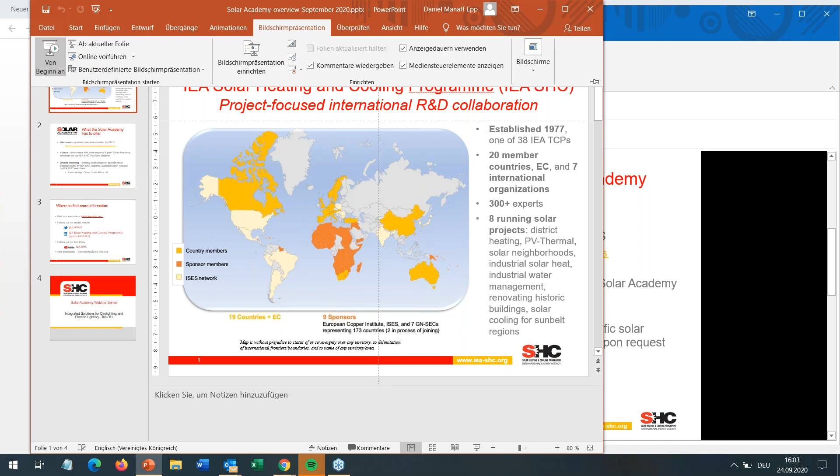SHC, the IEA Solar Heating and Cooling Program, is a collaborative research platform, really huge, with over 300 experts from around the world, from 20 member countries, the EC, and 7 international organizations. We have currently 8 running research projects, covering a wide range of topics all linked with efficiency and solar energy: district heating, PV thermal, solar neighborhood, industrial solar heat, renovation buildings, solar cooling for Sunbelt regions.

What we offer as Solar Academy is regular webinars, hosted with ISES. You hear one today, and you can find recordings of previous webinars under this link. We also offer videos on the YouTube channel, made with experts at conferences or around Solar Academy webinars. And we offer on-site training available on request by IEA Solar Heating and Cooling member states. The last trainings were in China, South Africa, and the UK.

If you want further information, please consult our website and follow us on social media. You see the Twitter and LinkedIn links here, and you can use our YouTube channel. If you have additional questions, please contact the Secretariat.

Today's webinar in this Solar Academy series is titled Integrated Solutions for Daylighting and Electric Lighting. Task 61 is IEA Solar Heating and Cooling slang, meaning it's the short-form name for this research platform within the program.

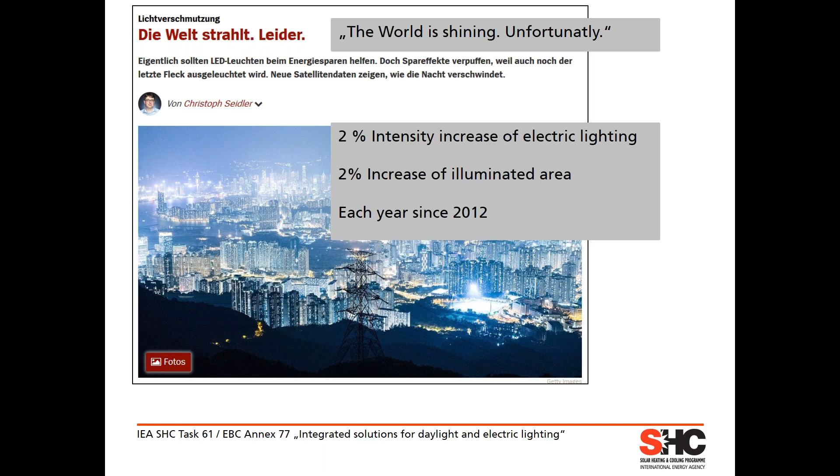We know that lighting accounts for around 15% of global electricity consumption, and also that lighting accounts for around 5% of greenhouse gases. So lighting and energy efficiency definitely is a topic we have to look into.

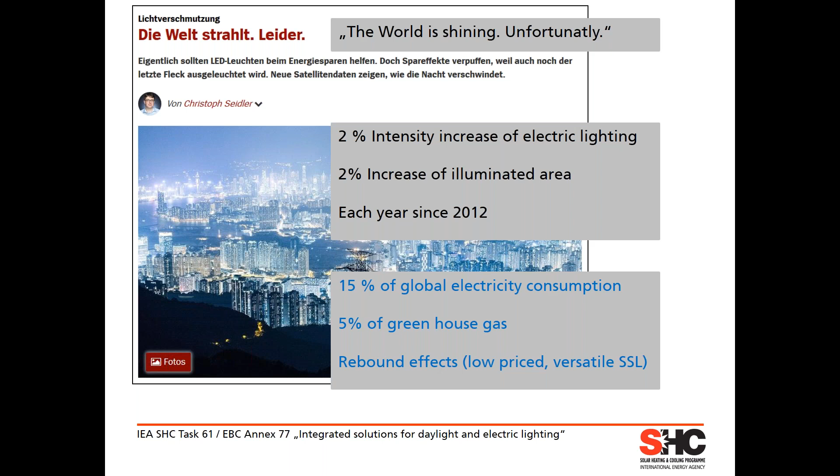Looking into the market, we all know about very efficient SSL systems, LED systems now around, but nevertheless we are seeing worldwide so-called rebound effects. Low price and very versatile LED systems are being used more and more in parts, compensating the efficiency gains we got.

A little on the background of the markets we are in: on one hand side, electric lighting. We went through a transition of technology here, around 70% estimate of market volume now in Europe in LED technology, replacing older technologies. We have an efficiency boost here, LED systems around twice as efficient as the formerly used fluorescent lamp systems.

And now the next step in electric lighting is very much into the digitalization of light, so you're getting more features, more functionality in parts for less money. It's a very dynamic change and transition we are in currently.

The other aspect we're dealing with is the facade, and thereby the facade influencing the daylight supply in buildings. The facade market has around 1.3 billion square meters of new facade put up each year. That's an amazing number, equivalent to the area of the city of London, put into place year by year. This has a huge impact on daylight supply and therefore lighting conditions in interior spaces.

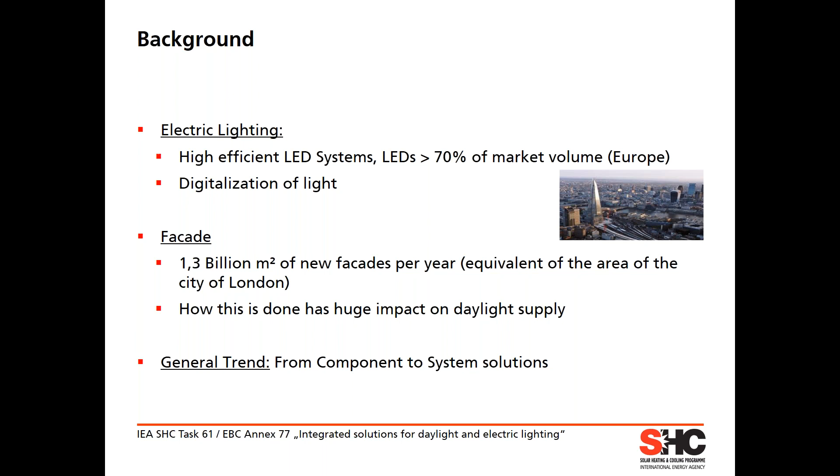Generally we see the trend of moving from component development more into system solutions, trying to optimize the integration of different components. That brings us to the topic of our working program: open issues in the integration of day and electric lighting. That addresses user aspects, energy efficiency of these combinations, technology side, and also market aspects for industry and for design practice.

Just to give a couple of ideas we addressed in the beginning of this activity: definitely the side of the user perspective. We are seeing changes in design and control parameters as we understand better that we have to meet not only visual but also non-visual effects. When designing lighting installations, we have to tailor lighting systems to different ages of people and users of spaces, and this has implications for different and additional targets in lighting designs.

For instance, we might see higher illuminance levels part of the time in future indoor spaces. That raises the question of whether we necessarily need higher energy demands for this, or if we can solve it smarter by, for instance, using more daylight. This has implications for new products, methods, solutions coming up - new control strategies, new luminaires, or also new rating methods.

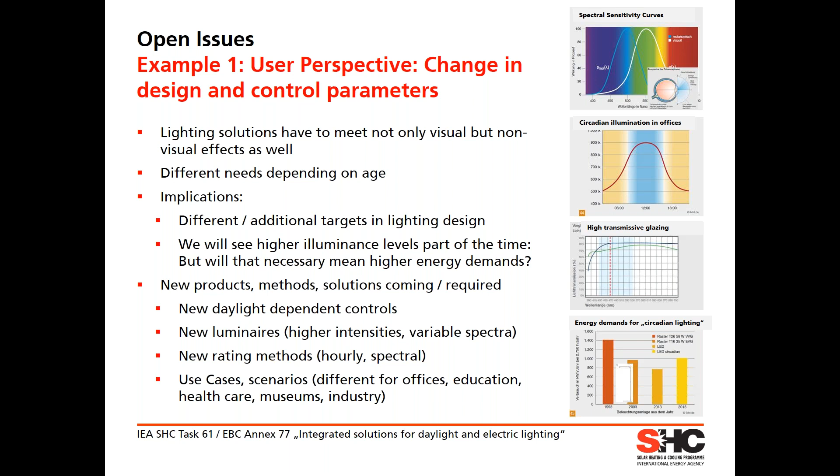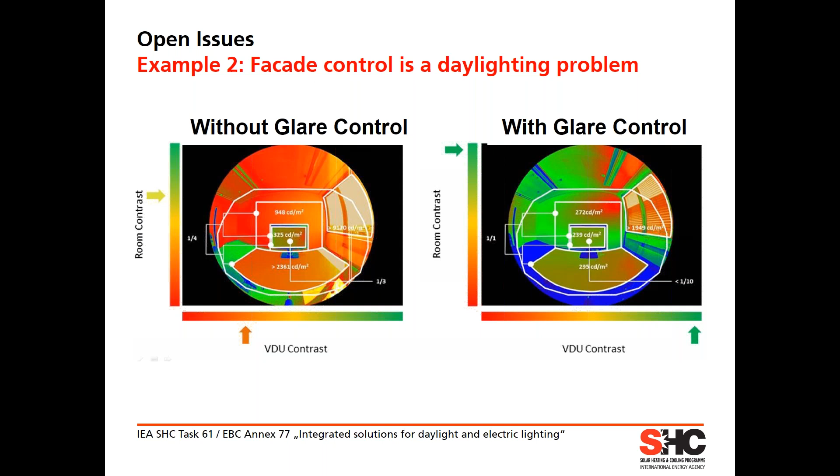Another issue is the integration of lighting environments in indoor spaces, bringing together light coming from the facade through sun shading and glazing systems with electric lighting. Up to now this has very much been driven from the facade side by solar controls, and lots of studies show that when people actively switch their facades or sun shading systems, they do it for lighting reasons, not thermal reasons. So the job to get done is to integrate these approaches better and bring electric and daylighting aspects together at workplaces.

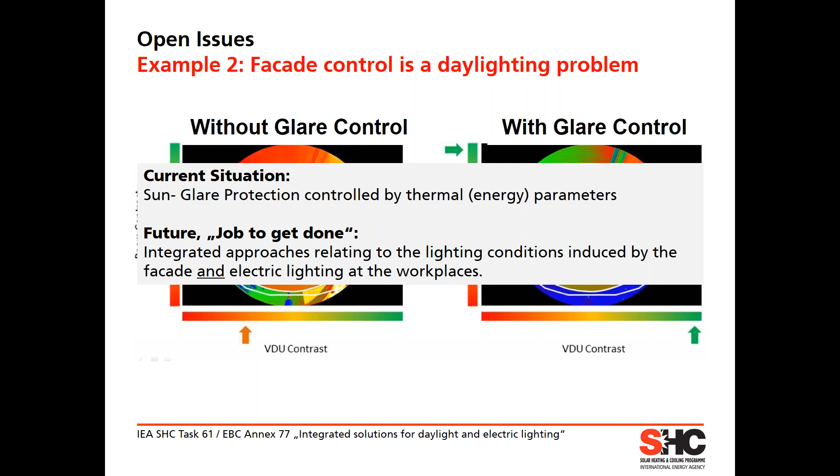The third issue is on the technology side. Today we know we have technically quite many solutions at hand - almost everything is technically possible, but will that be accepted? The key question is whether technical complexity also increases efficiency. If we have a difficult design, difficult installation, and difficult use due to not really matched technology, will that be more efficient than something very easily designed, installed and used? In the end, something very simple could be more efficient and better accepted. So we think that's worth looking into.

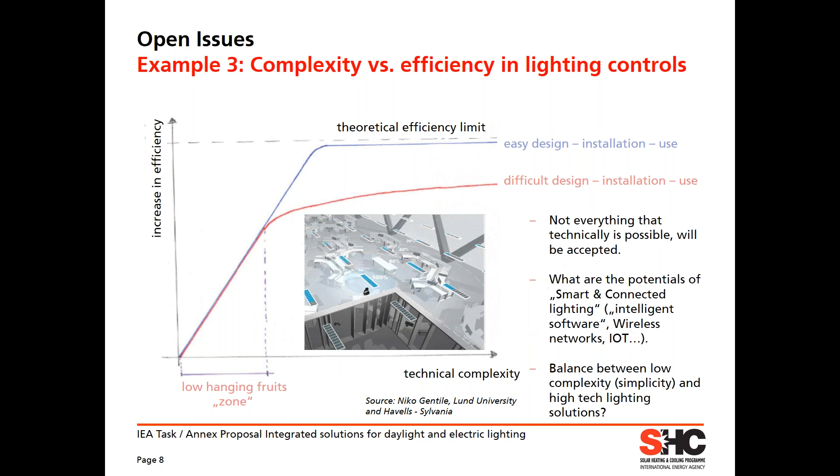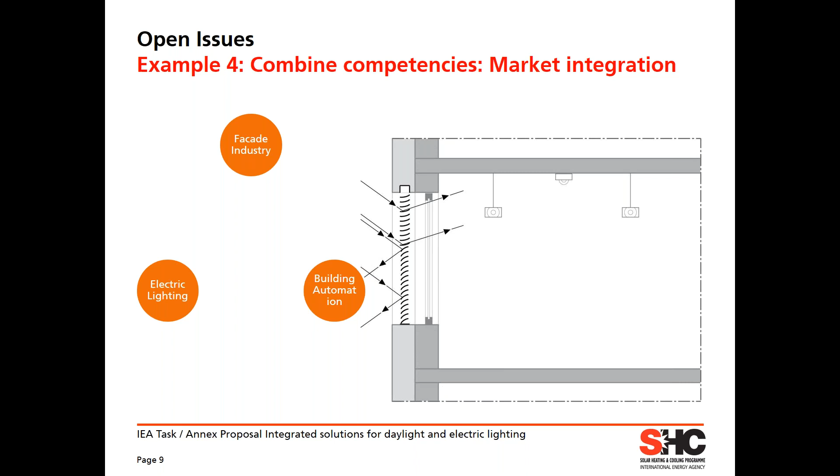Another aspect is on the market side. We are having different industries involved in lighting—classical electric lighting, the facade industry, building automation. And we see in the buildings more and more components being connected.

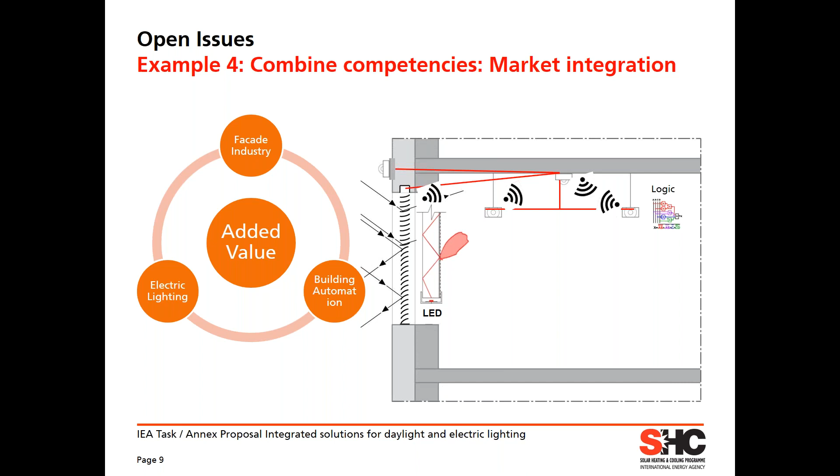We are seeing new function integration, for instance in facades, not only delivering daylighting but also electric lighting. We think that if we bring these different trades and industries better together, we can generate quite some added value. We also have to bring it into the design processes, to the desktops of practitioners, and put that in the context of national regulations.

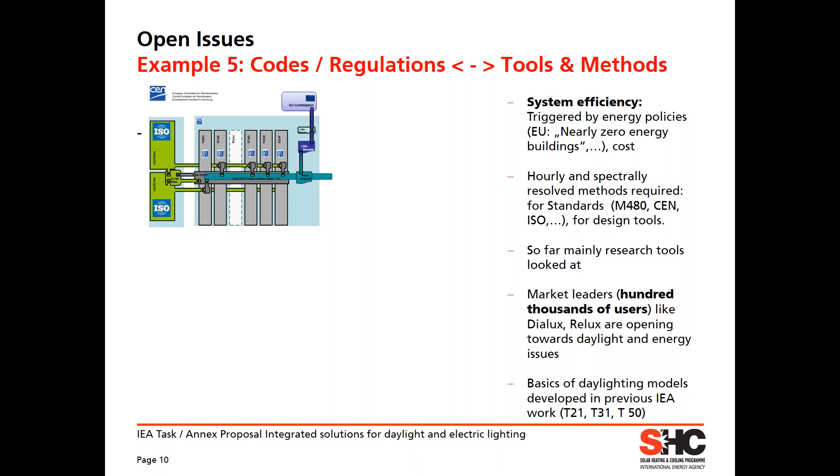There's quite a bit going on at EU level and national level trying to bring down energy consumption as a whole. Standards are important for that, so we think it's worth developing standards further, better connecting daylight and electric lighting aspects—for instance, having methods rating things on an hourly basis.

Also important is the improvement of design tools and rating tools. We're possibly including the market leader simulation tools here, closing gaps which still exist on the daylighting side and on the lighting control side.

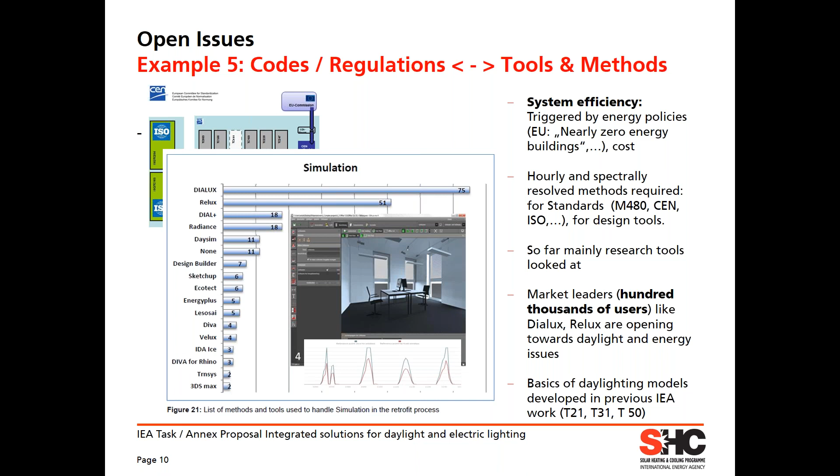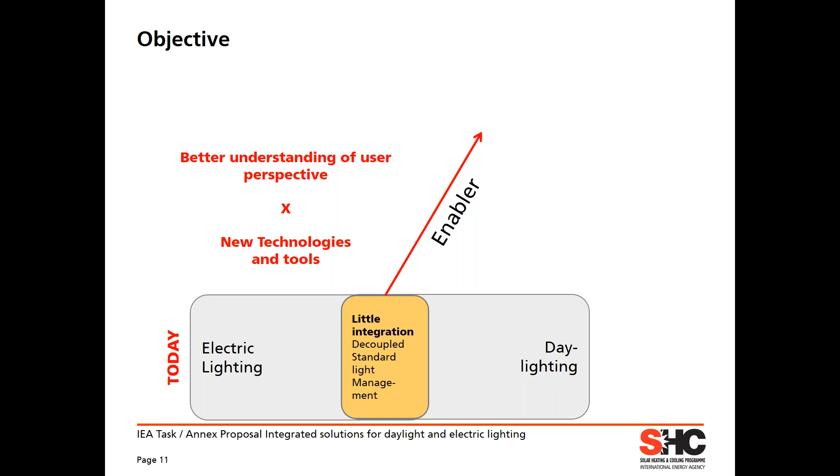That's another aspect we're looking at. Altogether, we're trying to push the integration of electric lighting and daylighting by using these enablers—better understanding of perspective, and new technologies and tools around it—hoping our program can contribute to a higher integration of user-centered lighting at high system efficiency, implementing daylight as a template for electric lighting solutions, and linking market and industries better. In the end, we hope to give a little push for more energy efficient lighting and damping these mentioned rebound effects.

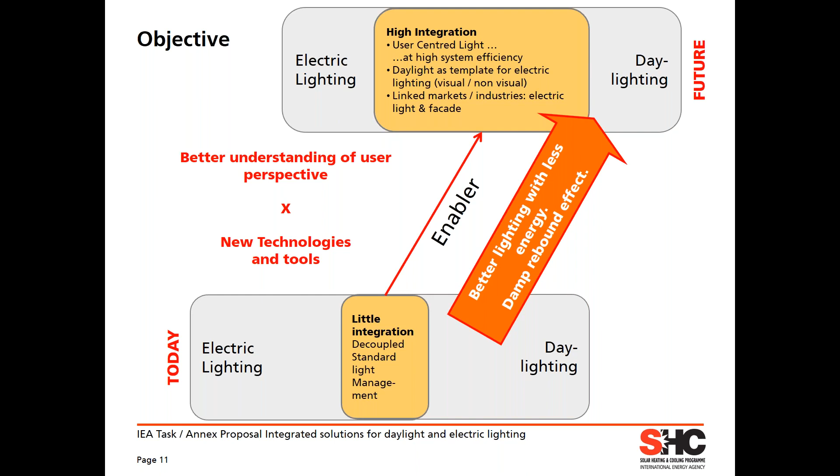The task structure we've given ourselves is basically four main subtasks. Subtask A deals with user perspective and requirements. Subtask B is on the technology side, integrating and optimizing daylighting and electric lighting. Subtask C deals with tools, design support, and design workflows for practitioners. Subtask D does validation in demonstration projects, lab and field study performance tracking.

All of that is cross-connected by two activities: the development of a new evaluation and rating method for integrated lighting solutions, becoming part of an ISO standard, and also going into widespread lighting design software, plus a VR-based decision guide, which Mark is going to talk about a little deeper in one of the next presentations.

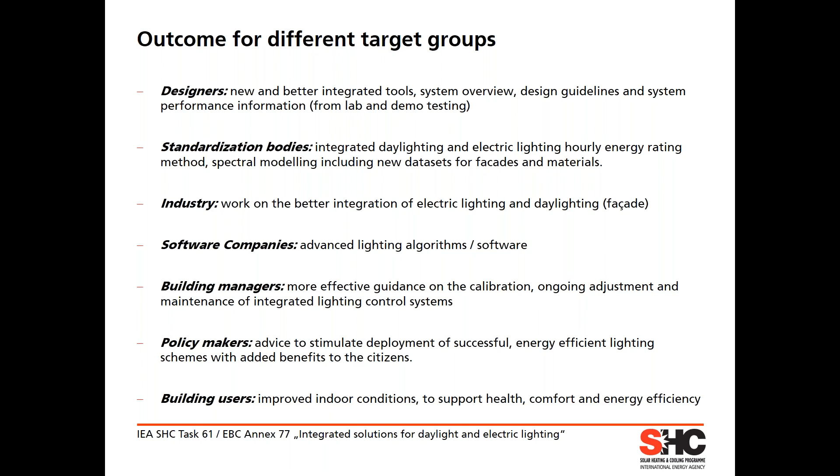In the end, we are bringing results and publications for different stakeholders—designers, standardization bodies, industry, software companies, building managers, policymakers—and hopefully for building users we can improve indoor conditions, support health, comfort, and of course energy efficiency with this program.

To give you a brief idea of who is behind this activity, as Bärbel mentioned, it's a quite big research group of around 35 experts from 14 countries, coming from both research institutes and industry.

We have early publications out, for instance a position paper on the use of daylight in non-residential buildings, giving indications of actions eventually needed for governments, NGOs, and private sectors. We now have the first reports from the research program out, with more coming during the next year as we're in the final year, plus a newsletter available. If you're interested, you're cordially invited to follow us on the website of Task 61—the publications coming up will be available and downloadable from this site.

And of course, keep in mind to use light intelligently. So thank you very much.

Thank you, Jan. I think you gave us a great insight into how complex the field of lighting is, which we use every day, even between research and practitioners. Thank you so much. We will have questions at the end. And that's why I can already introduce the second speaker to you, which is Barbara Matusiak.

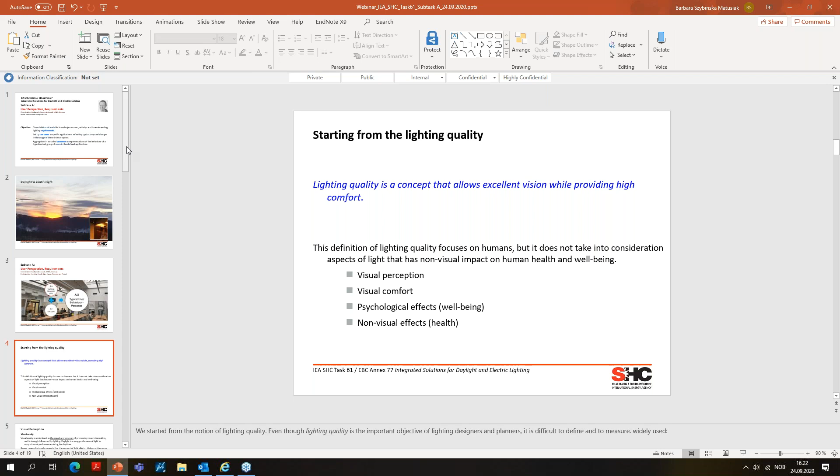So what have we learned so far from research studies? About visual acuity: recent research strongly suggests that the amount of light affects children as they grow, and determines whether they will develop myopia or not. Myopia, or short-sightedness, is the most widespread visual disorder affecting young people. It has reached an epidemic level in Asia, and it is increasing everywhere.

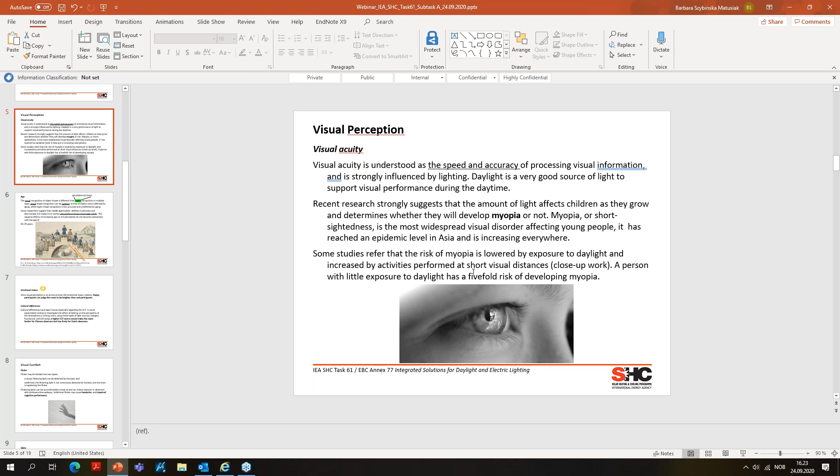Some studies report that the risk of myopia is lowered by exposure to daylight, and increased by activities performed at short visual distances, so close-up work. A person with little exposure to daylight has a 5-fold risk of developing myopia.

What have we learned about age? Visual recognition of object shape is different from haptic recognition in multiple ways. Visual shape recognition can be superior to that of haptics, and it's affected by aging, while haptic shape recognition is less accurate but unaffected by aging.

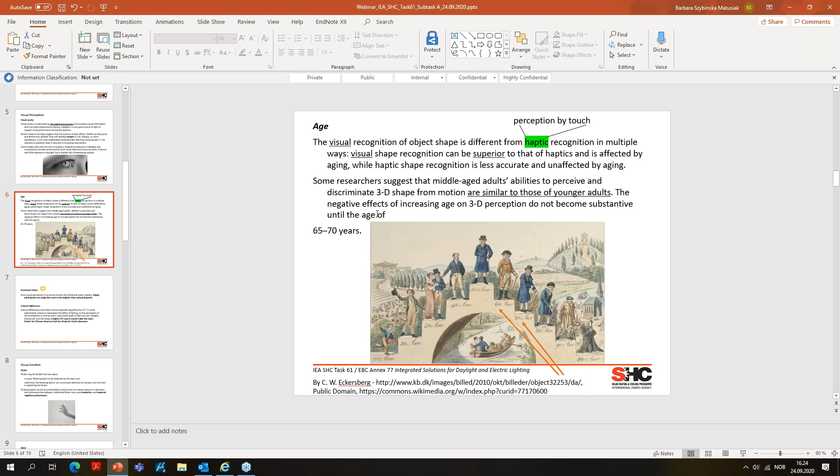Even though some researchers suggest that middle-aged adults' abilities to perceive and discriminate three-dimensional shape from motion are rather similar to those of young adults, the negative effects of increasing age on 3D perception do not become substantive until the age of 65 to 70 years.

What about emotional status? Since visual perception is an active process, emotional status matters. Happy participants can judge a room to be brighter than sad participants.

We also found cultural differences, especially regarding the color temperature of light. In some experiments investigating the effect of lighting on the perception of atmosphere in a room, using three types of light sources, a higher color temperature source would make the room livelier for Chinese observers, but less lively for Dutch observers.

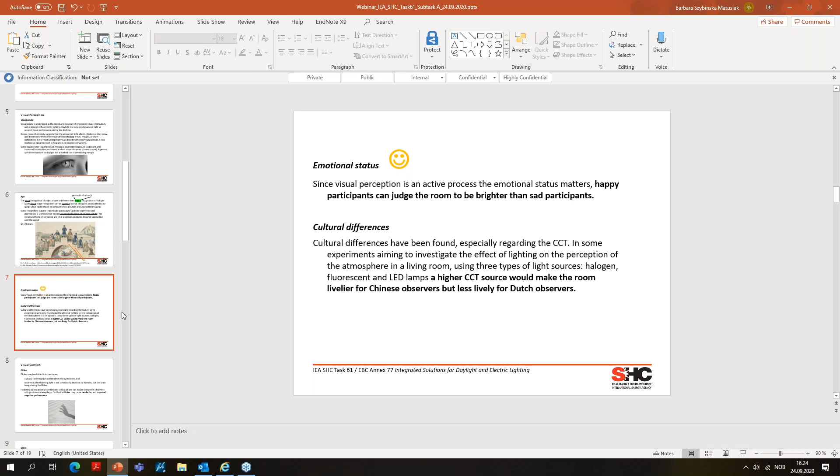Flicker may be divided into two types: visual flickering light, which can be detected by the eyes, and subliminal flicker, which is not consciously detected but the brain still registers it. Flickering lights can be uncomfortable to look at and can induce seizures in observers with photosensitive epilepsy. Subliminal flicker may cause headache and impaired cognitive performance.

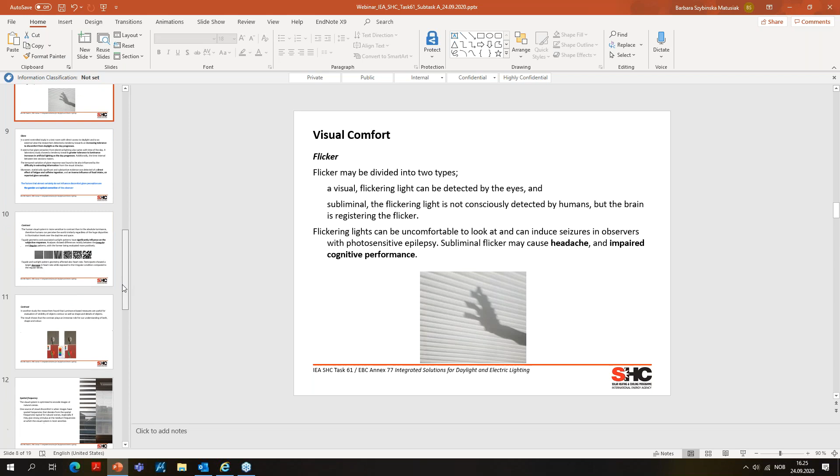Glare. In a semi-controlled study in a test room with direct access to daylight and an external view, researchers detected a tendency toward increasing tolerance to discomfort from daylight as the day progressed. It seems that glare sensation from electrical light also varies with time of day; a laboratory study showed a tendency toward greater tolerance to luminance increases in artificial lighting as the day progressed.

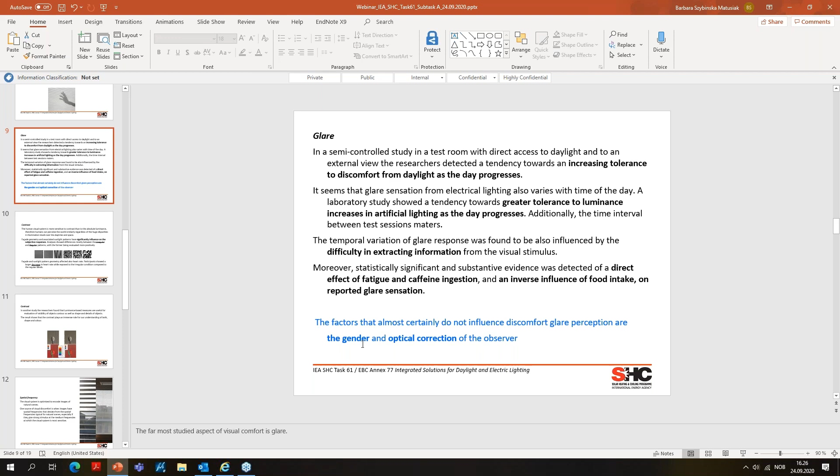Additionally, the time interval between sessions matters. The temporal variation of glare response was also found to be influenced by the difficulty extracting information from the visual stimulus. Statistically significant evidence was detected of a direct effect of fatigue and caffeine ingestion, and an inverse influence of food intake on reported glare sensation.

What about contrast? The human visual system is more sensitive to contrast than to absolute luminance. Therefore, humans can perceive the world similarly, regardless of the huge disparities in illumination levels over the daytime and space.

In one study, facade geometry and associated sunlight patterns significantly influenced subjective responses. Analysis showed differences mostly between irregular and regular patterns, with the former being evaluated more positively.

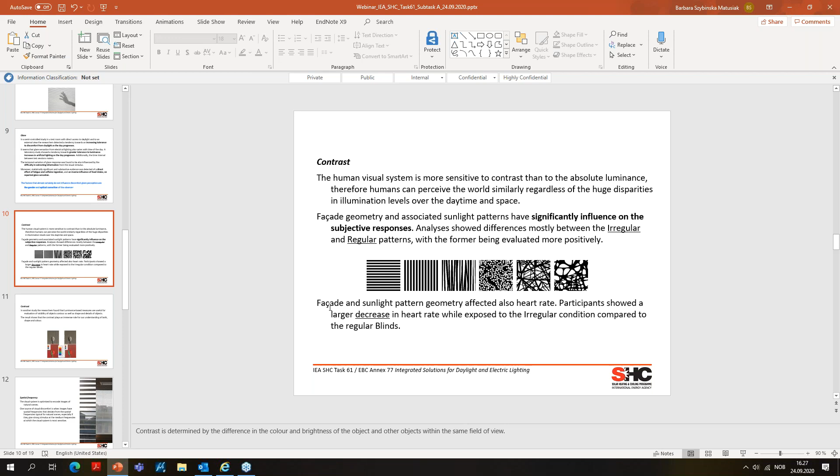It also had an impact on heart rate. Contrast can be measured by luminance ratio, and we can look at spatial frequency.

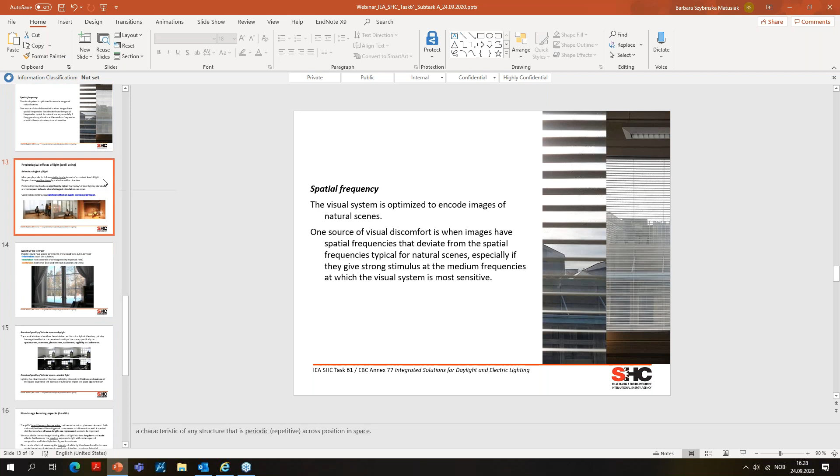The visual system is optimized to encode images of natural scenes. So one source of visual discomfort is when images have spatial frequencies that deviate from the spatial frequencies typical for natural scenes.

And then we can look at the behavioral effect of light, how people use it and what sort of lighting they prefer. Again, people should have access to windows giving a view, because of information, restoration, and aesthetic issues.

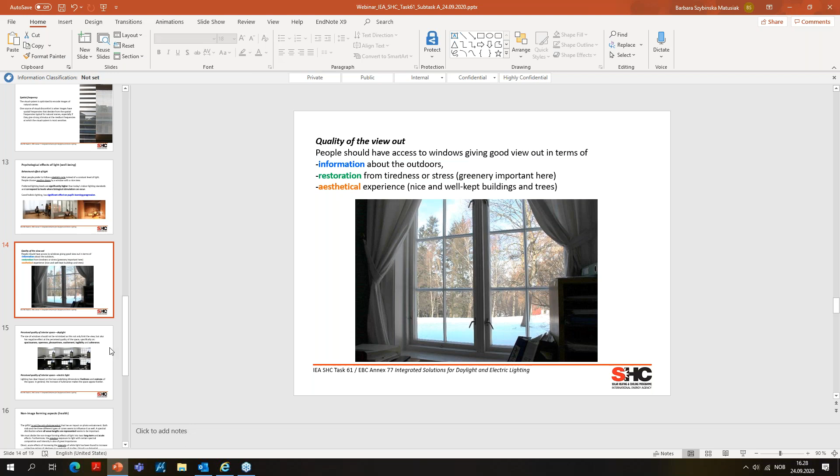And window size should not be limited, not only because of limiting the view, but also because window size affects the sense of spaciousness, openness, pleasantness, excitement, and legibility and coherence of the room.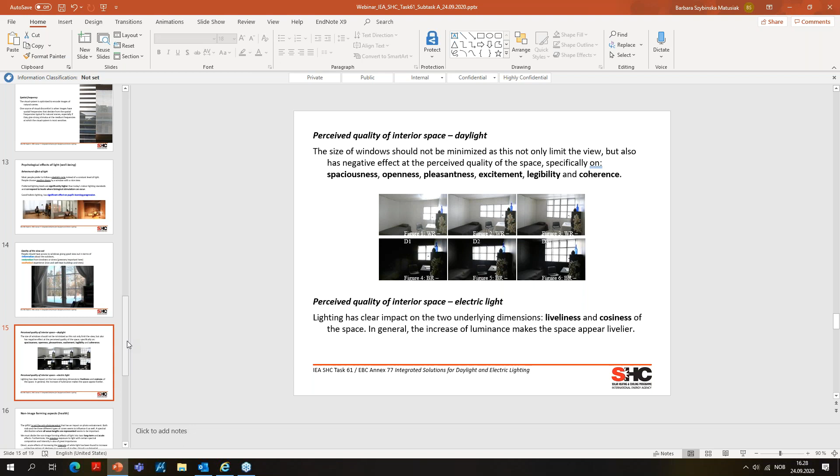I also have a quite long series of information about non-image forming aspects. Maybe the most interesting is that there are differences related to chronotype, age, and gender. There are also changes in chronotype over time.

Girls and women seem to be significantly more morning-oriented than boys and men. Young children are more morning-oriented and become rapidly evening-oriented during puberty, while the more attenuated turn toward morningness occurs from the age of 20 years, and it's more stable.

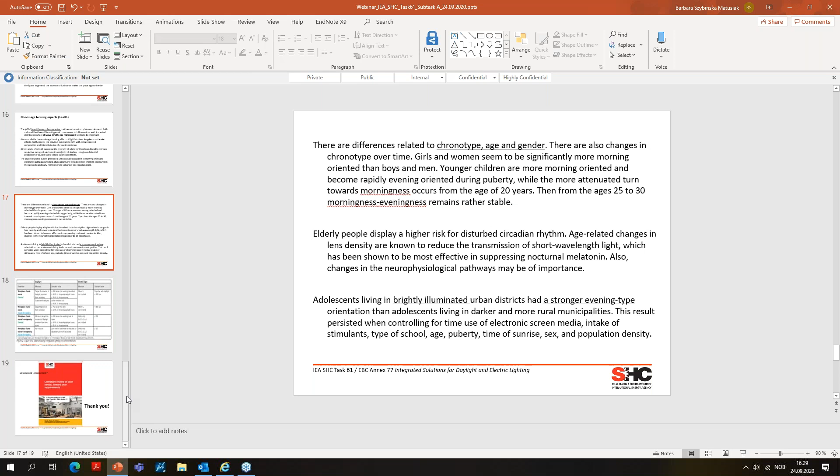And elderly people display a high risk for disturbed circadian rhythm. So, based on the literature review and results from ongoing research projects, we are proposing recommendations for daylight and electric light for the first time in one publication, in one very long table.

A part of the table you see here, so we have daylight and electric light, and for example workplace illuminance in general - what are the recommendations here, and for electric light as well, for visually demanding tasks, and so on.

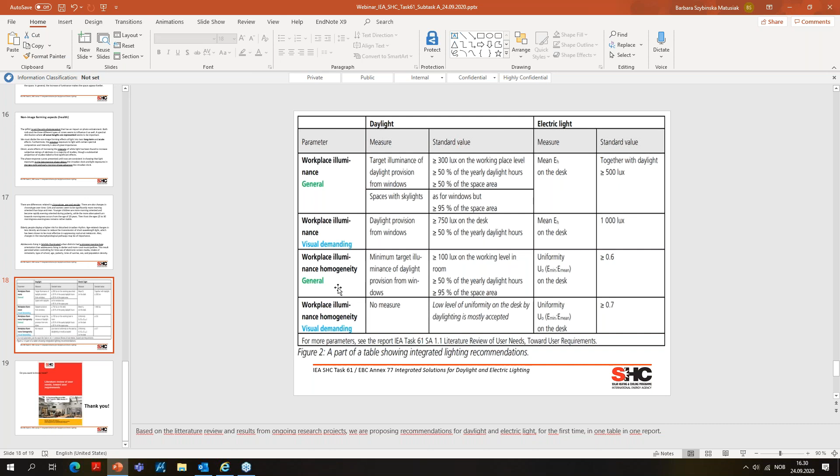So I recommend, if you would like to know more about human needs and recommendations, the report we call A1 will be published very soon, probably already in October. Yes, thank you very much.

Great, thank you, Barbara. Very impressive, very nice to see lighting and health being linked by researchers, and even looking into gender aspects. Thank you very much.

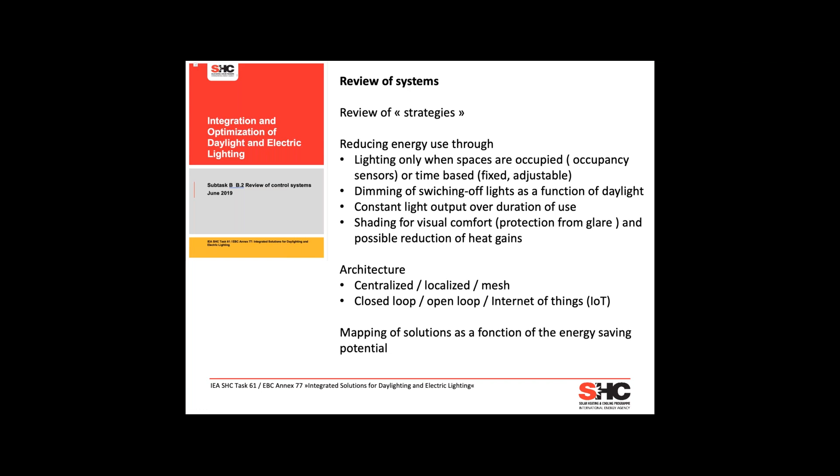We're reviewing also the market structure, depending if it's residential and non-residential, which are very different markets for the application. And you have drivers like in individual buildings, very much related, for example, to security issues. Often it's much more related to heating problems, overheating, whatever, and lighting is just a second aspect.

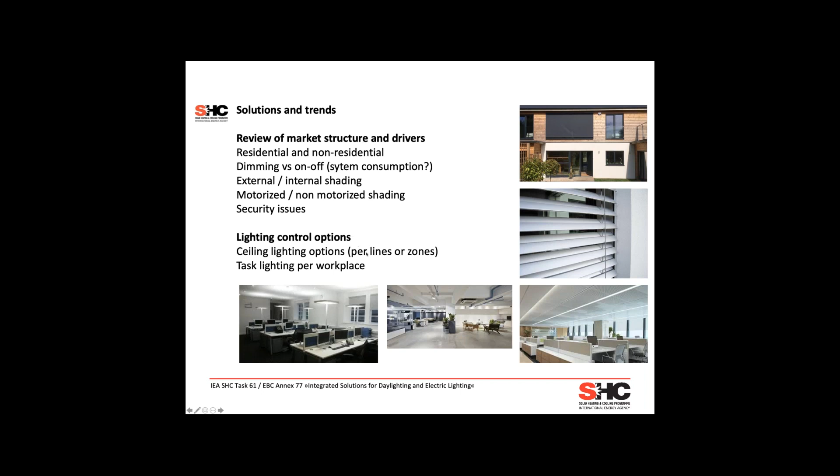So it's hard to really fully link the control technique to only lighting quality. It's a bit more global in buildings.

We also see movement changes, a lot of protocols of communication, and this shows that lighting control is part of a more global system. And often if you have a very well developed BMS, the lighting control is only part of it and could be cheap with few sensors.

So you have a whole range of control, from fully dedicated to lighting, to completely integrated in BMS. And now with the data architecture coming in the buildings, now the data system like the PoE, Power over Ethernet, can even light the lamps.

We have two IEEE standards on this, PoE 100 watt system, and also the single pair approach, which we expect will also put price down for controls.

We see some initiative for DC powered lamps, 48 volts, which allows transformers to be centralized and not from every light source. New sensor systems and chips with geolocalization can really adapt lighting to your area.

I don't want to go too much into this new proposal of architecture. Some of you are probably involved with photovoltaic systems, and photovoltaics produce DC current, usually rather high voltage, but there's a number of actors that think part of the building could be powered with DC power. We also have a push from companies in the automobile industry, especially electric cars, with components that may move to the building from the car industry. So we're checking that very important evolution which is happening.

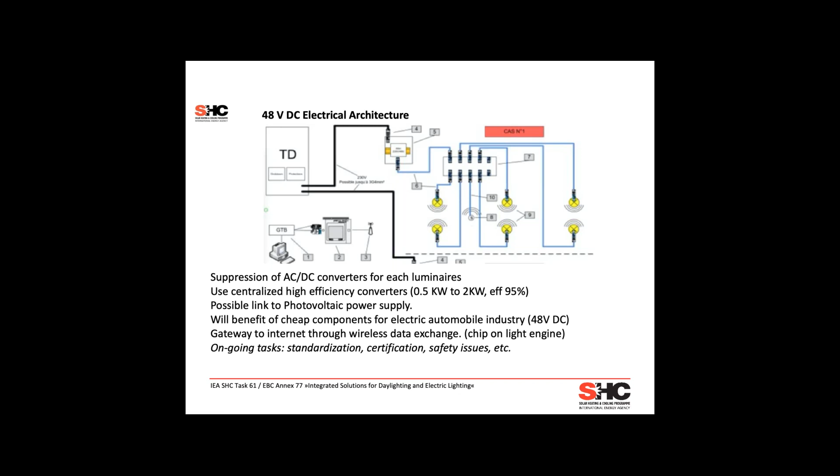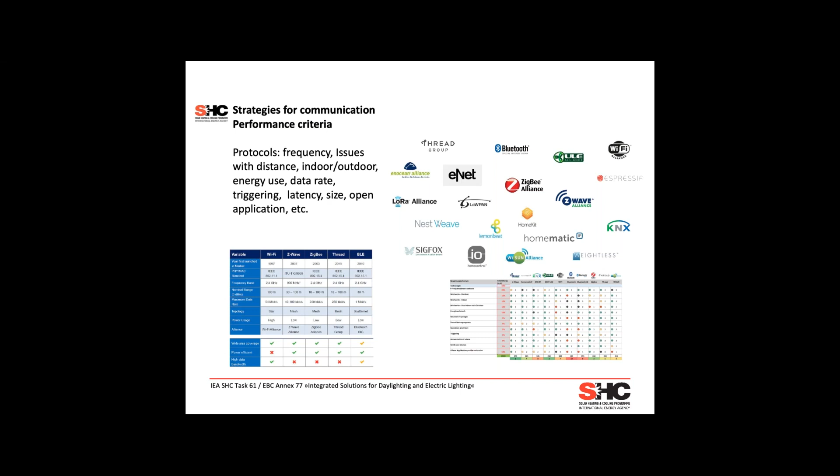We looked at a number of performance criteria of all these systems with protocols, their advantages and drawbacks. We also look at future trends, with an analysis based on value creation. Part of these lighting control systems are basically solving problems today, and part of them are also creating new values, new functionalities, new opportunities to run this better.

This is something we have absolutely identified, and it's impressive to see how the market is pushing for development of new systems in a global manner. Having a talk recently with people working in the electric car industry, which is very much driven by software development, you could see that software is moving into this lighting control business to make things versatile, practical, remote control, flexible. That's something we look at and report on in our next report, B3 and B4.

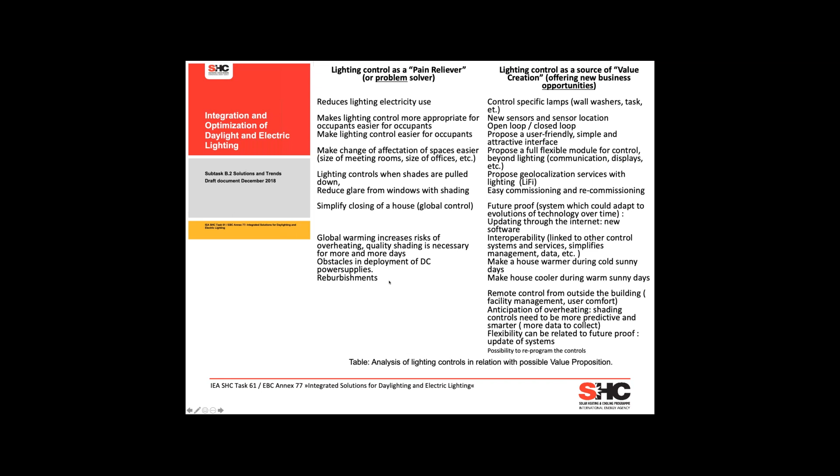We are covering user interfaces, which is impressive what is happening. We have the classic analog controls, the switches you all know. Now you have more and more digital aspects, on screen, on the wall, on your smartphone, on a tablet. We also see mixed hybrid systems where you can mix control by turning or having physical interaction, but also communicate with colors and other signals. It's impressive what is happening in this domain.

I think it's very creative. It could simplify the world, making global management of buildings, hospitals, schools, commercial centers, or your home more practical, but we're also very concerned with the robustness, the simplicity, the commissioning, the maintenance.

Components are progressing and being shared, and we check the trends on that. We try to really look at what the systems are doing for energy savings, because the motivation is often very far from purely energy saving. So we want to inform the readers about the potential there.

We see something which is not so developed: combined control of lighting and daylighting is not really the main focus of this development, but we try to capture systems that allow doing both. We look at the evolution of motors, shading systems, and electrochromic glazing, and how they could be combined with...

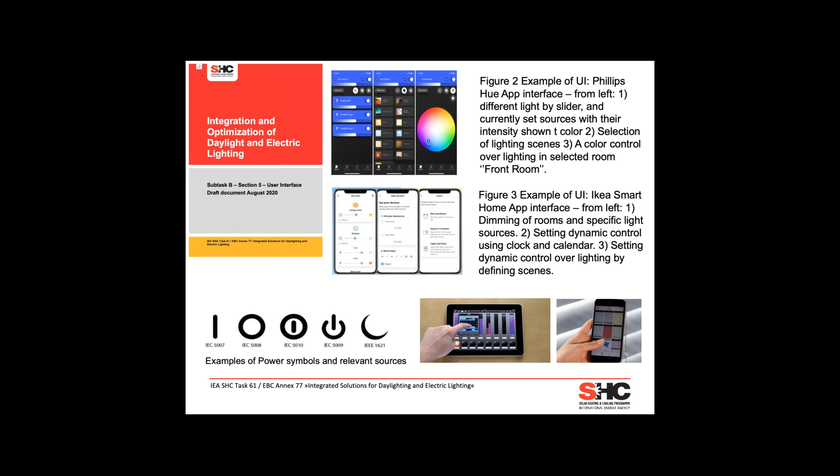So I'm continuing, just the very interesting interfaces, whether they are a niche market or will be dominant. It's really on the target, and that's what we are discussing. We have global issues regarding that.

We need to finish this document about the lifetime. The model of lifetime is very important because we are talking about systems with different lifespans: the control has a life, the drivers have a life, the lamp has a life, the luminaire has a life, and we are addressing this in the report too. Finally, we have a report on standards, because there are relevant standards, new standards being developed, and also we identify needs for new standards.

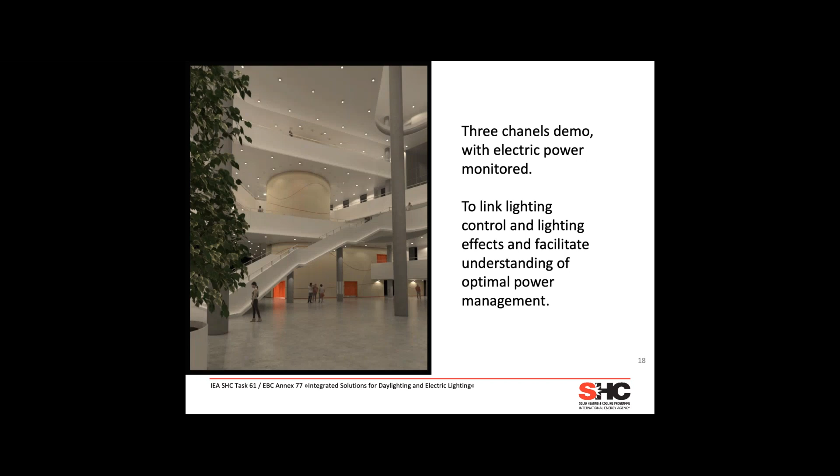I think I will have, if I could play this on my screen here. I hope you can see that. Do you see my screen? I hope so. Maybe not. Yes, no, we see your screen, yes. You see your screen, okay.

So you see, you can vary the daylight in the room. We have different lighting scenarios. You can play up and down, and you can simulate graphically a number of lighting control systems. We plan to have a number of lighting control systems demonstrated on the website of the IEA.

Task 61. Okay, this is where we are now: 5 reports. Some of them are coming soon, and we hope you will be delighted to have them and review them. Thank you very much.

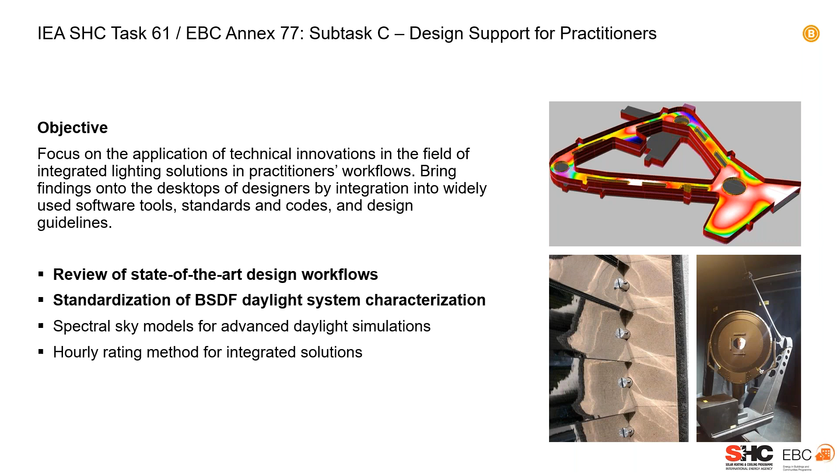So I'll give a short overview of the design workflows and the daylight system characterization topic. For the design workflows, what we did in that state-of-the-art review, we first defined example design projects to give the reader an overview of how such systems, such buildings, such architectural designs can look like, and how the lighting design with integrated solutions for electric lighting, daylighting, and controls can look like, and what different applications can be.

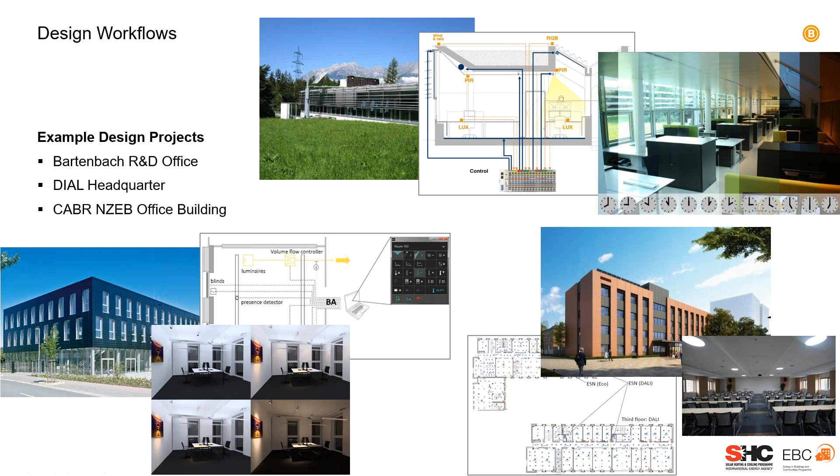So we have three different and very nice examples in there: our R&D department here at Bartenbach in Aldrans, the office building from Dial in Germany, and the building of the Chinese Academy of Building Research, the Net Zero Energy building in Beijing.

In a second step, we gathered inputs from different groups and different people joining the group about the used workflows in practice, as well as proposed workflows in standards or from public entities. So we, for example, have workflows that we use here at Bartenbach, workflows used by Norconsult at Inform Design, at DIAL. But we also have workflows described that are standardized in the ISO standard 16817, or, for example, proposed by the German LITG in their scope of services.

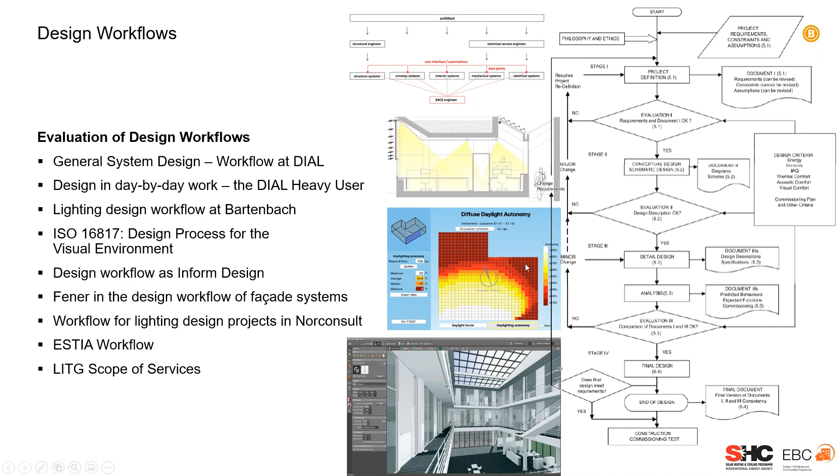As today, all design process and design workflow is tightly connected to simulations, which are either for evaluation in the end, but also often in the design process. If we think of parametric design, for example, these are an important means of design nowadays.

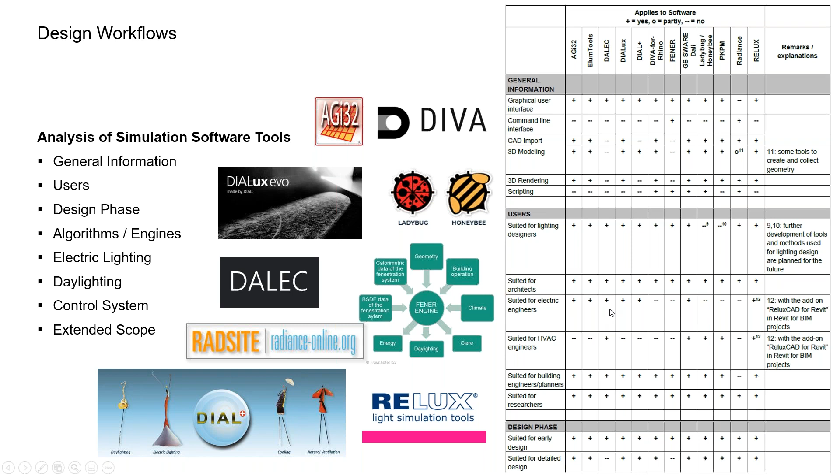We also took the time to compare and put them next to each other and check the different features that design tools provide. There are quite a number of software solutions out there which can be used for designing daylighting and electric lighting solutions, and also the controls for these integrated solutions. We did that for different aspects used in and necessary for the design process. We summarized general information, which kind of user group is addressed with one or the other tool, in which design phase they can be used, and so on. So we put them next to each other and got a nice overview of the current situation in terms of software solutions.

All that is put together in a report that is already published, already out there for all who are interested in more depth. It's more than 100 pages of information about the currently used workflows and software for the design of integrated lighting solutions, as the title of the report says, and you can find it on the webpage of the IEA Task 61.

My second topic that I would like to dig into is the characterization of daylighting systems. If we talk about simulation capabilities, there are some tools out there already working with so-called BSDFs. So quickly talking about BSDF, what is it?

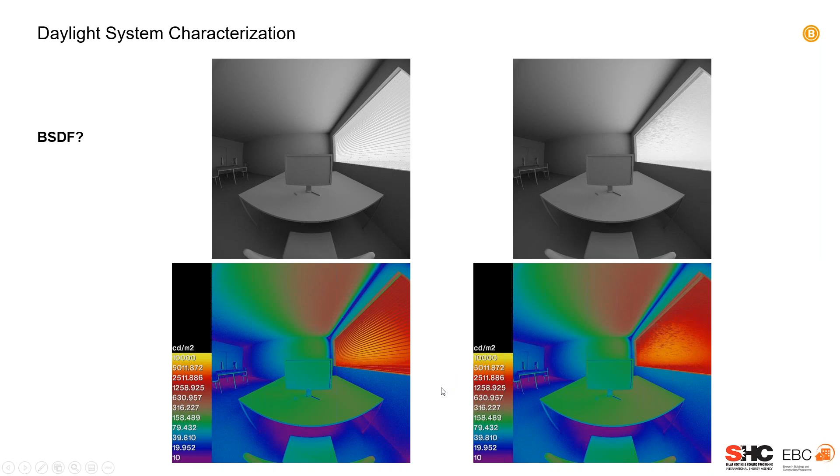As a concept, this is not new - it has been out there for quite a while, but the way into the mainly used simulation software is still not yet that far. There are software systems out there that can use data like that, but there is still work to do to really have it in wide application for practitioners.

So why do we need that? If we think about a very different area, as an example cars, there's the certificate of conformity, which exactly describes the technical characteristics of the car. We have the same for electric lighting - we have IES or EULUMDAT files that describe exactly the lighting distribution from a luminaire. And we have the same thing with BSDFs, but we don't have a real standardization and standardized format for this kind of data yet.

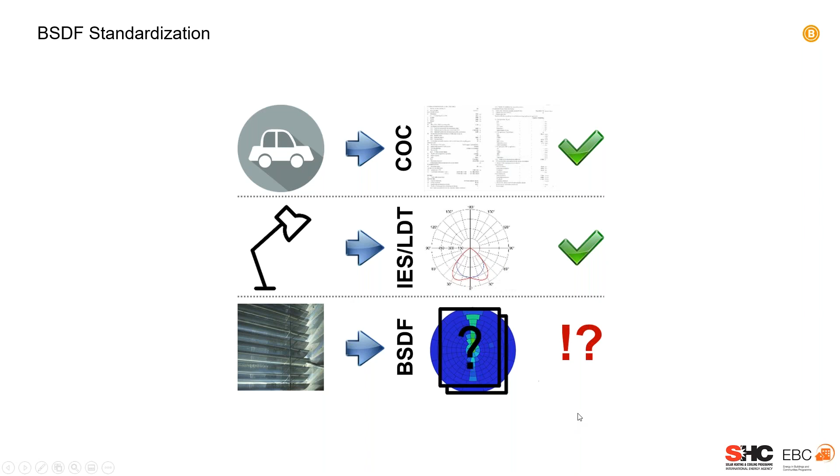The other thing is, as I mentioned, for electric lighting we have quite some simulation tools and possibilities to do proper simulations. For daylighting systems, there are still quite some questions, and it has not found its way into the widely used software systems yet.

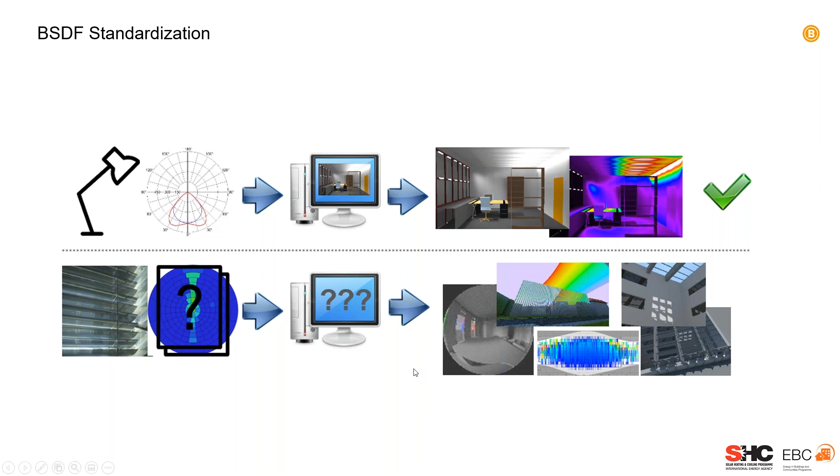So what did we do within the task so far? One thing we did is a sensitivity analysis to find out the necessary resolution of these kinds of data sets for different kinds of systems and applications. For example, if we want to do an illuminance calculation, finding the overall lighting inside the room, we will need a different representation than if we want to do a glare calculation, which is based on the luminance distribution directly seen at the window.

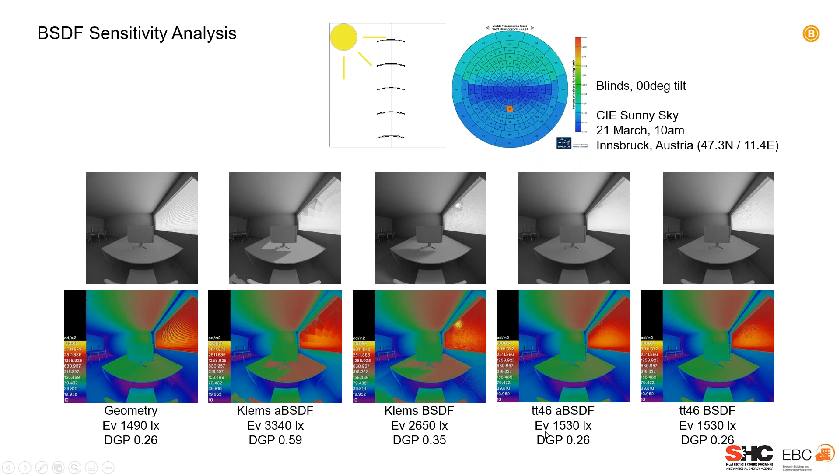So we did a sensitivity analysis to find that out for different kinds of systems - for blinds, for fabrics, for clear glazing, and so on. The overall aim is to derive the right and necessary kind of data set needed for the different kinds of systems - for example, for transparent systems, for redirecting blinds, for micro shades, for fabrics, for textile roller shades, and so on. This is an important step towards

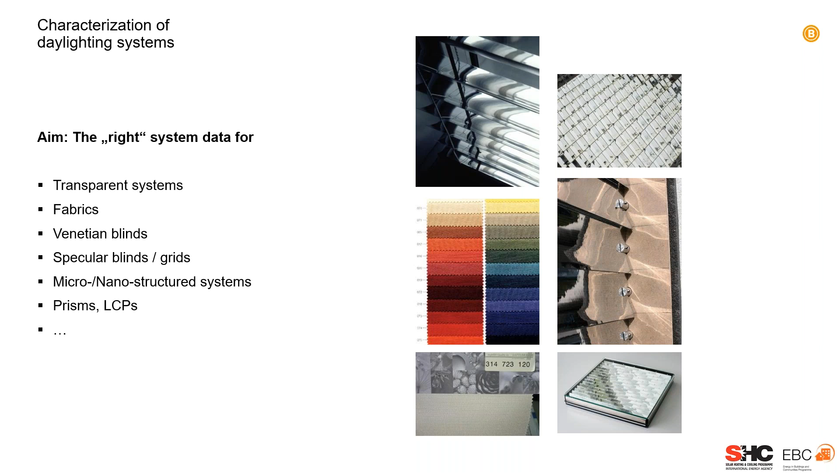bringing that into practical work, as we need to inform industry which kinds of data sets and which resolution they should provide to the designer, so they can properly include these systems already in the design phase and do proper simulations for any application they want - be it illuminance or glare calculations or whatever.

So our aim in the end is to come up with a proposal for different classes of systems. This is now work in progress. We have, for example - I took out this example - diffusing general Venetian blinds, which are widely used, especially in Europe.

As I mentioned, for different tasks and different metrics we want to evaluate, we will need different simulation methods, and these are tightly connected to which kind of data sets and which resolution of data set we need to put into that model.

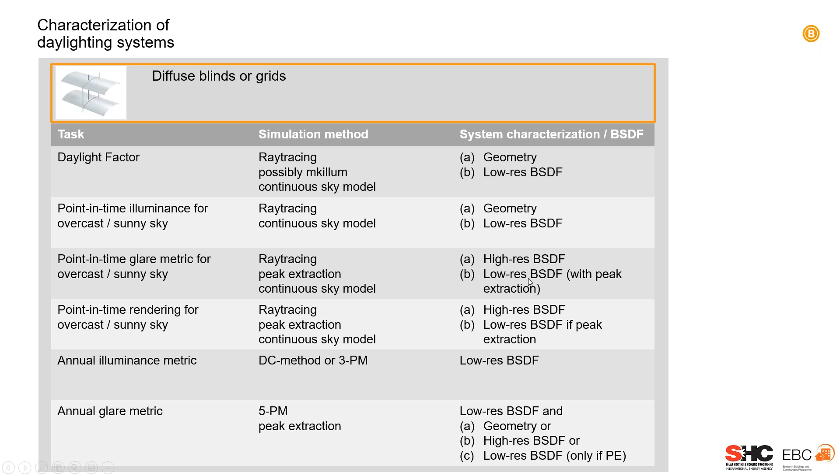So as I said, this is currently work in progress with the experts in that IEA Task 61 joining here. We do have quite a number of active participants from all around the world, from the USA, from Switzerland, from Germany, from China.

They're following partly different approaches in the way they measure, in the way they generate those kinds of data sets. But in the end, we are trying to put all these together to propose a good way and a good working possibility to come up with these kinds of data sets.

And propose to industry which kind of data sets for daylighting systems to bring these kinds of data also to the places of the practitioners. So we are currently working on this white paper. It is in a quite good stage already, so it will be released soon. We're currently having our IEA meeting in parallel, and we are discussing the last changes to that white paper.

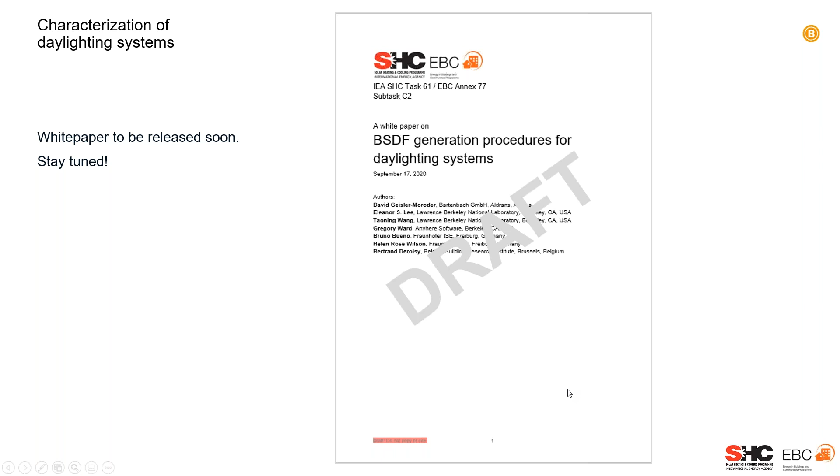So stay tuned; it will be online on the Task website as well. Very soon you'll find it there. So let me at the very end thank our funding agency here in Austria for also supporting the research that is behind that activity. And yeah, I'll give the word back to Bärbel.

Thank you very much. Thank you. Yeah, thank you, David. Very nice insights. I think very valuable work for practitioners, from practitioners, very highly appreciated.

We come to our last presentation, which is actually a tandem one. So we will hear Nico Gentile and Werner Osterhaus. They share together one of these subtasks within Task 61. Nico will start. He is assistant professor at the Institute of Architecture and the Built Environment at Lund University in Sweden. And then Werner takes over. He is an architect, lighting designer, and professor of lighting design research at the Department of Engineering at Aarhus University in Denmark. They both will focus on lighting systems in health environments and offices. So please, Nico, go for it.

Yes, thank you. It will be Werner driving the presentation. Nico Gentile here, Lund University, and I will give you a brief outline on the work that we are doing in the case study. Werner, if you can switch to the presenter's view here.

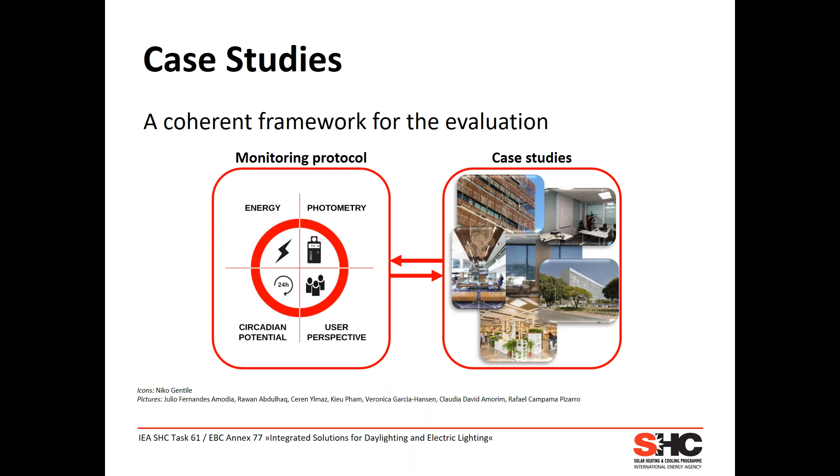It's a bit dynamic because we are looking at real occupied buildings, so in these times it's sometimes a bit difficult. There are projects coming in, some going out, but in general we have a quite nice geographical widespread here.

We have an overrepresentation of offices, but we also have healthcare buildings, educational buildings, some living lab, some retail sector. And we have a number of solutions that have been used here that you will see.

Daylight harvesting systems, open loop, closed loop, granular lighting controls, electrochromic glazing, some special shading devices, low-cost solutions in listed buildings, and perforated facades, and I'm surely forgetting something.

Interestingly enough, one of the solutions that is more used in the newest buildings and newest projects we have is integrative lighting. Integrative lighting is a lighting system that is able to change in intensity and color throughout the day in order to support the circadian rhythms of individuals.

And how do we evaluate that? We have different techniques, and one of those is to try to log the individual intake of light in terms of both intensity and spectral power distribution. And this is best done with wearable devices.

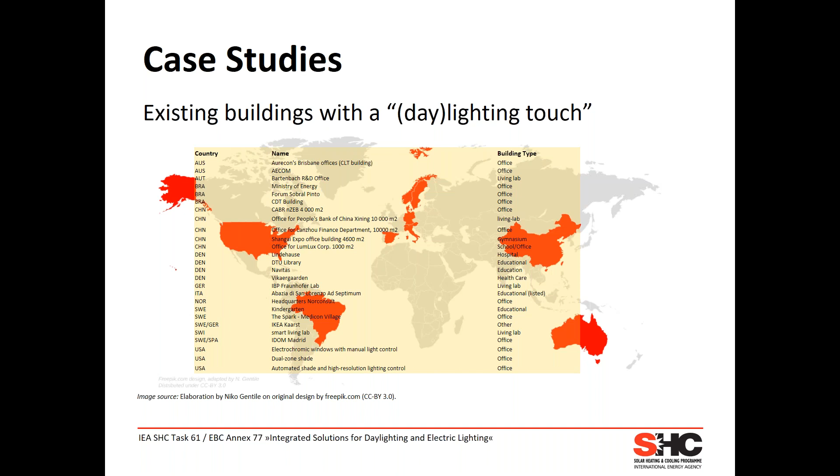In some projects, we were able to get that. Veronica, in particular, could test different devices that are now available on the market, and she will provide some lessons learned and experience from using different devices. So, Veronica, the stage is yours.

Hello, I'm going to talk a little bit about these different wearable devices that we have investigated. We do this to link people's well-being with integrative or circadian lighting, in order to understand what people are exposed to during a particular day and how that might support their individual well-being. This has to do with both the visual and non-visual aspects of lighting, but also some of the emotional aspects.

During the day, a person is exposed to different lighting conditions, whether at home, in the office, or anywhere else outside in buildings. And we need some dynamic measurement methods in order to evaluate that, if we want to measure the personal light exposure that a person experiences during the day.

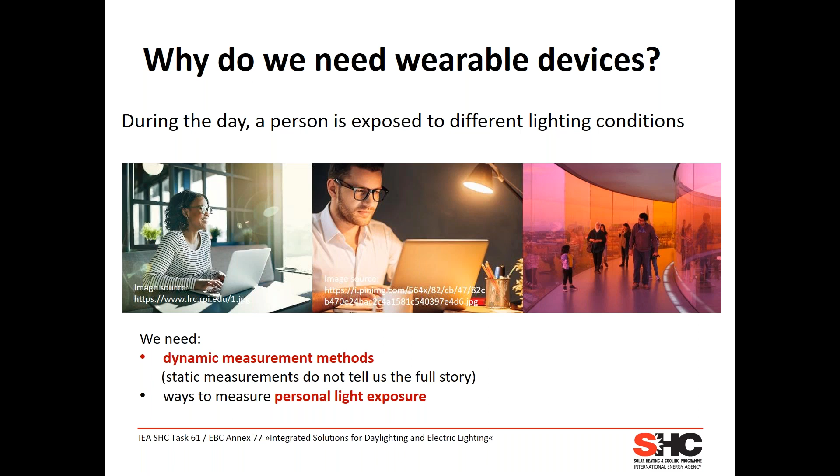What do we need in order to understand that exposure? Because the spectrum changes depending on the lighting conditions, we really need to understand what the spectrum actually is of the light source, and how that spectrum contributes to our health and well-being. We also measure the photopic illuminance, the normal lux levels, and we try to understand the different wavelengths if necessary, as a compromise if we can't get the full spectrum of any particular light source.

And we want to correlate those photometric measurements with other human factors, for example activity levels of people, to see whether it helps them sleep, or if they're awake all night, or whether they can be energized in an office by a particular lighting system.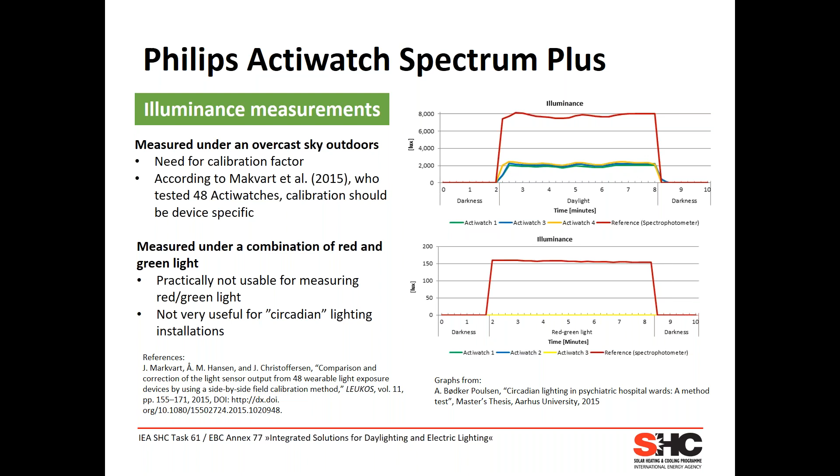In relation to activity and sleep analysis, you get some graphs out of the ActiWatch in terms of the actual intensity of the activity, and then the software suggests some period where it is actually sleeping or resting, and indicates that. But it's not very reliable because you often need to combine it with some other information.

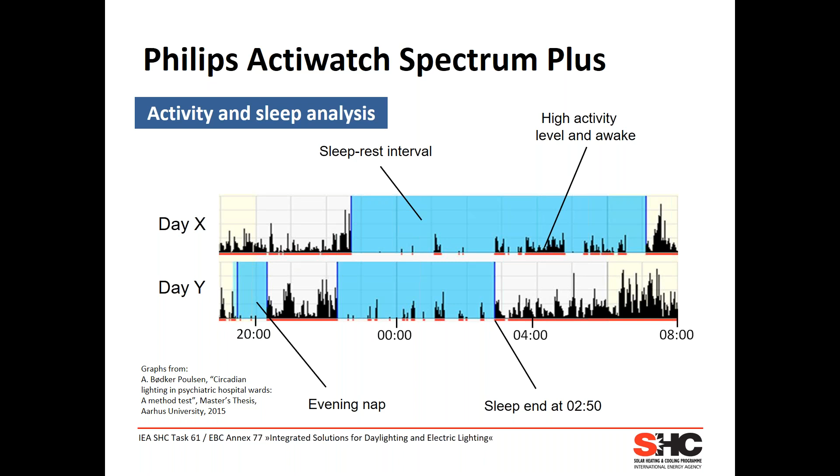One of the examples we had was a person sitting on an exercise bike for quite a while, almost 3 hours, moving with every body part but the wrist that was holding on to the handlebar. Only because one of the nurses observed this person for quite a period of time did we know that the person was not sleeping, which the software had suggested, but that the person was actually on the exercise bicycle, with the hand not moving because it was fixed to the handlebar.

Another thing that we use...

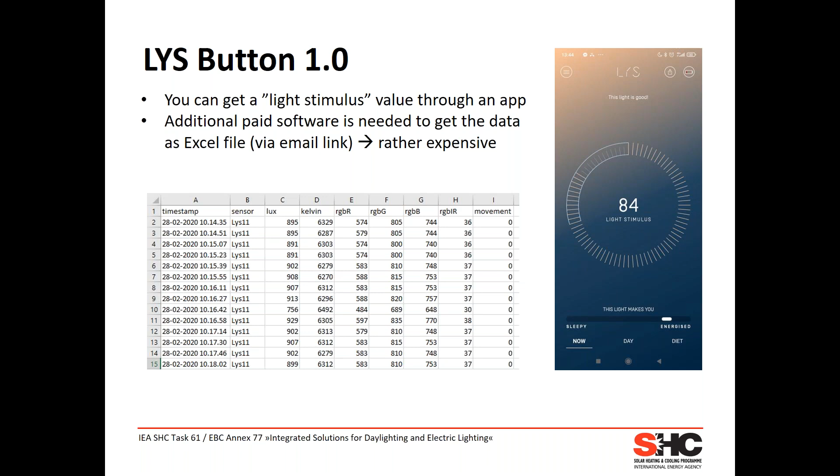You can get on your screen on a mobile phone a light stimulus, which we don't really know what the value shows. If you want to get more data out of it, for example the RGB and infrared channels and color temperature, you need to buy quite expensive software, which is used for that. And we can also see that the calibration of these are rather difficult.

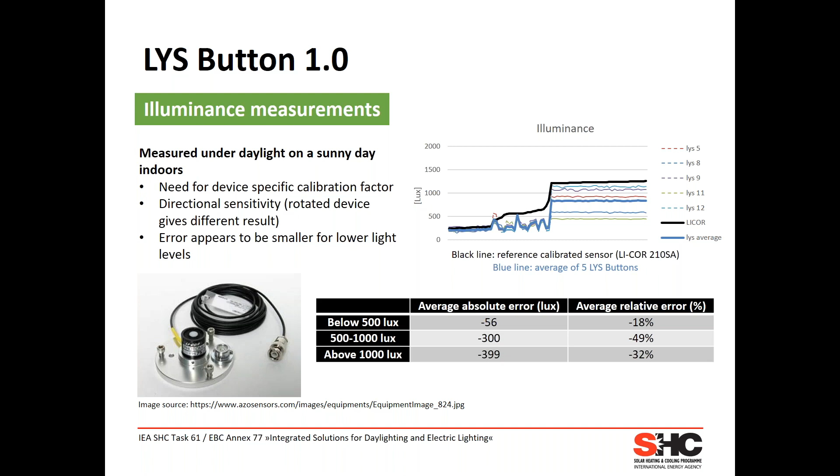Different Lys buttons measure very different levels. And if you turn them around on your shirt or something like that, you get very different values again. Color temperature is one of the good things with that; they're rather close. And in terms of activities, it measures something in relation to acceleration, which is expressed in G figures.

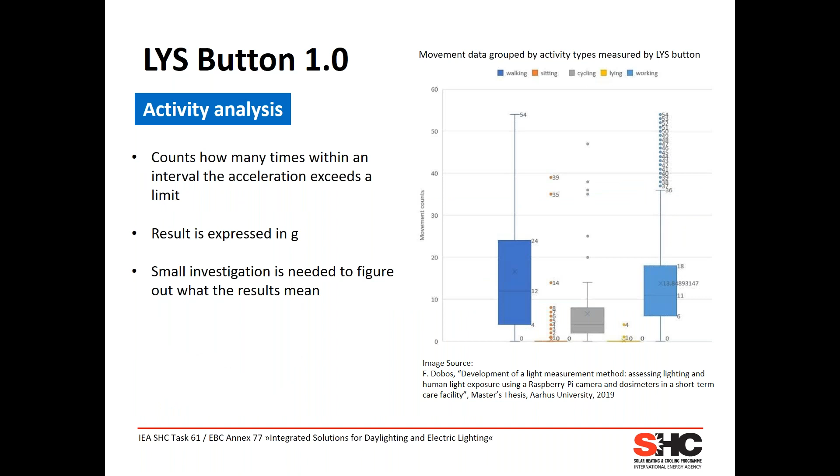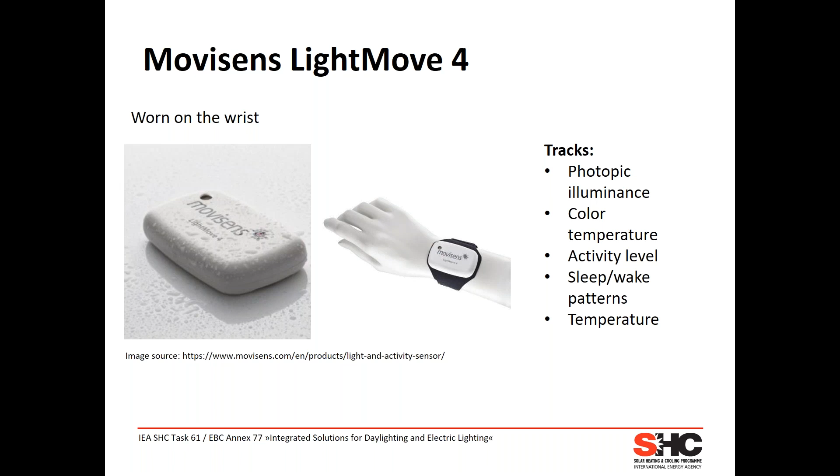The Movisens was also worn at the wrist, and it covers photopic illuminance, color temperature, activity level, sleep-wake patterns, and the temperature. We also compared it with the Lys button, and they were quite different, although theoretically they should measure the same kind of activities.

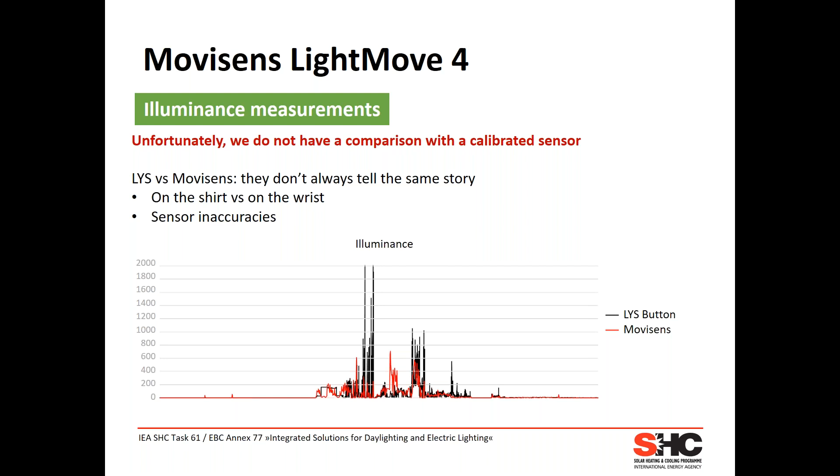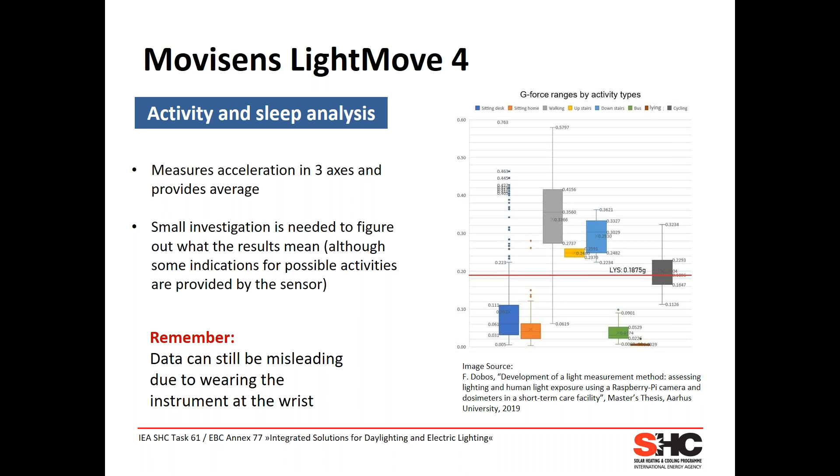When you try to link it with your activities and what it's recording, it's a good idea to also have a diary where you write down what you were actually doing at the particular time, because with the Movisens also being worn on the wrist, this can be quite misleading at times.

So some of the problems we've found: light measurements are not always reliable. Markvart et al. have found that the differences can be up to 60% for the same exact type of ActiWatch. That matches quite well with our experience of very large differences between the same type of equipment.

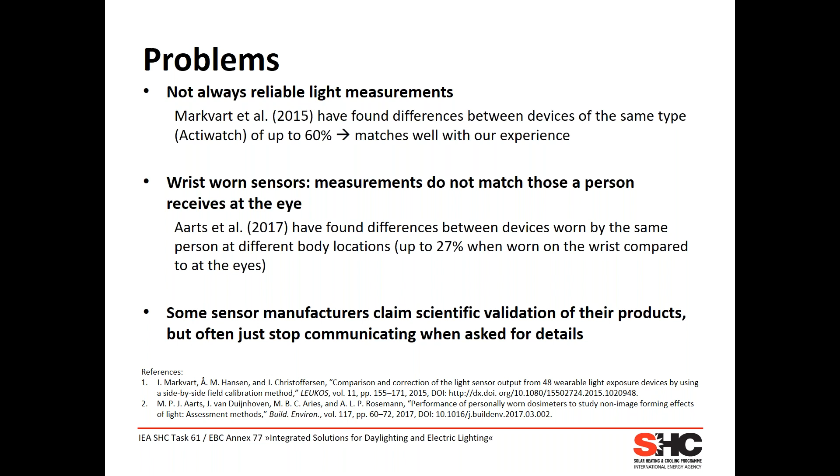With wrist-worn sensors, it does not match the light levels that the person actually receives at the eye. There were also around 27% differences between what is recorded at the eye and what's recorded at the wrist. And while some sensor manufacturers claim scientific validation of their products, they stop communicating when you ask for some of the details. So that's a bit tricky to actually confirm.

So what do we recommend? If you can, use more than one type of measuring device and compare the results. Try to calibrate all the instruments before you use them against a calibrated sensor, because that's not supplied by the manufacturers. But as researchers, we would be very prepared to work with manufacturers on developing some procedure for that, but that may increase the cost of the devices.

We should select sensors which are closer to the eye and facing the same way, rather than things at the wrist, which might also be covered by clothing at times. We should try to combine measurement data with observations or diary entries, and we need to be extremely critical when looking at the results we get. So avoid making conclusions based on data which may be questionable unless you can confirm it with some other aspects. Thank you very much.